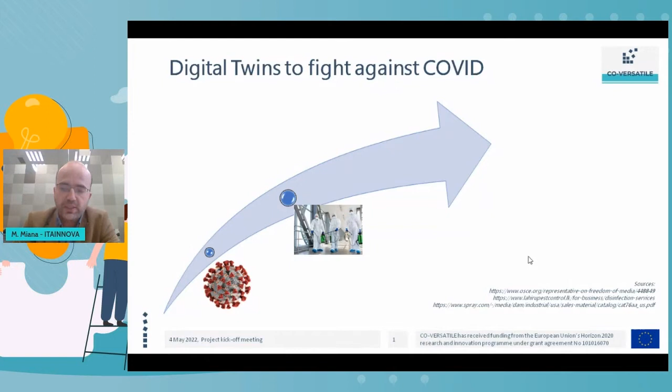At the beginning of the COVID crisis, there was a very important requirement about disinfection devices in order to be able to clean up all the surfaces to reduce the infection by the COVID virus. So it was necessary to obtain a spraying device that could perform in an effective and accurate way the disinfection of this kind of surface. As a result of this project, we are going to develop a digital twin that can help in the design of the spraying nozzles in order to obtain the best solution for the development of new spraying systems.

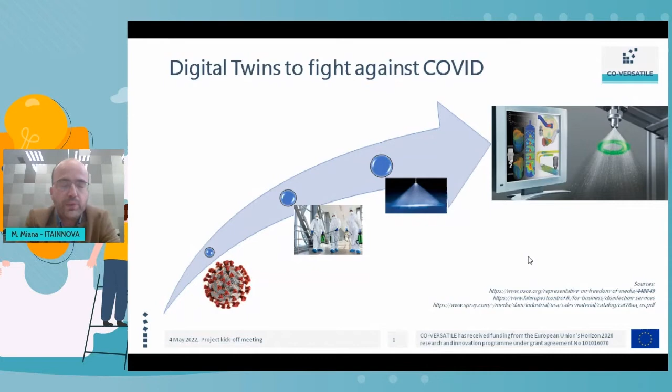ITAINNOVA is a technology center dependent on the local government of Aragon. Aragon is one of the 17 regions where Spain is divided. We are located in the north and east of Spain. We have more than 35 years of experience in guiding and helping companies to be more competitive and excellent through innovation and technological development. We are more than 230 people, about 20% of them have a PhD degree, and we have strong human resources in engineering.

We have more or less all kinds of engineering: mechanical, chemical like myself, electronic, computers, telecommunication engineers, and we have a significant amount of graduates in mathematics, physics, chemistry. Of course, we have a large number of people with strong curriculum on technical and scientific disciplines.

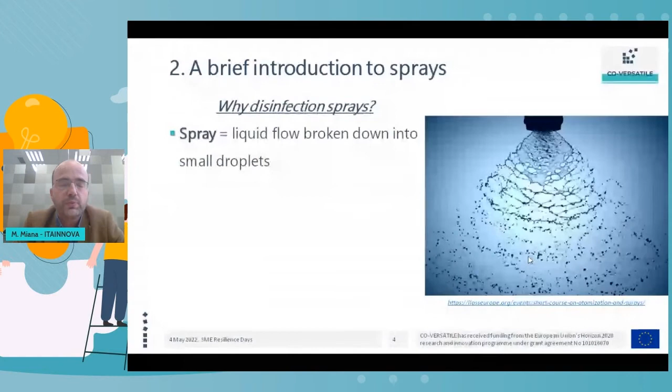The advantage of this kind of system is that you can reduce infection using lower liquid flow rates. If you want to reduce infection and reduce the amount of virus on a surface, it's better to use as little liquid as possible, so you obtain a cheaper disinfection process. And of course, you want to obtain better coverage than using a typical tube and soaking the surface.

When you use the disinfection spray, you obtain all this better performance in the disinfection process. And if we want to improve the design, we have to define the design variables or design parameters, in order to know if our new design is better or not than the previous one.

These design parameters are typically: the distribution of droplet diameters, the angle, the range, and the shape of the spray cone, shown in this picture.

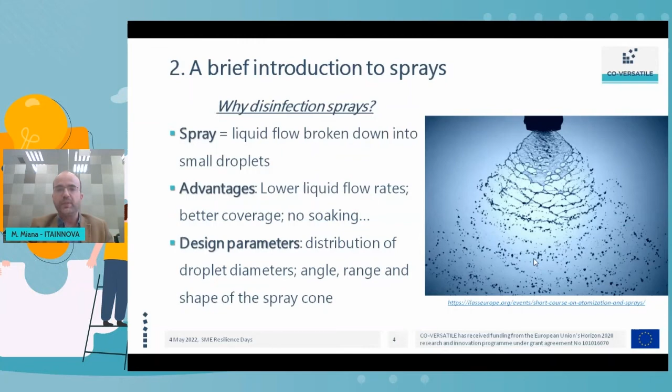There are two different kinds of spraying systems. The first one is hydraulic atomization, where a pump pushes the liquid flow through an orifice, and this motion provokes the breaking up of the liquid flow into small droplets.

The main benefit of hydraulic atomization is that you apply lower energy than the other system, which is pneumatic atomization. The main disadvantage is that you obtain a larger distribution of droplet diameters compared to the pneumatic system.

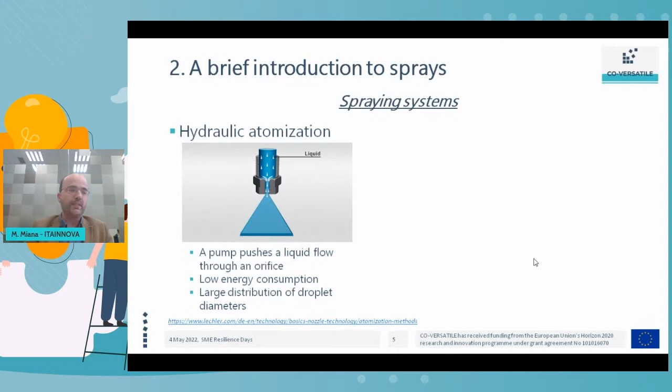In pneumatic atomization, you have a compressor that generates a high-speed airflow, and this airflow is responsible for breaking up the liquid flow. With this system, you're able to obtain droplets of smaller diameter and with a more uniform distribution.

On the contrary, if you remember your thermodynamics classes at university, compression of a gas flow requires more energy than compression of a liquid flow. So pneumatic atomization typically requires more energy than hydraulic atomization.

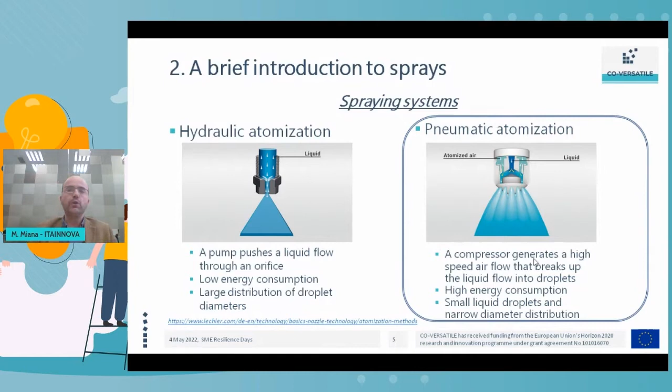In this project, we are going to focus only on pneumatic atomization. We are not going to deal with hydraulic atomization.

The heart, the main part of the spray system, is just the nozzle, where the liquid and the gas are mixed. All the design parameters of the spray - for example the shape, the range, the distribution of droplet diameters - are always governed by the shape and dimensions of the chamber where both streams are mixed.

You can see in the picture in the center of the slide that there are very different shapes of the spray angles, and very different concentrations of particles in the center and in a crown around the center. You can obtain practically all the shapes you want using different nozzles.

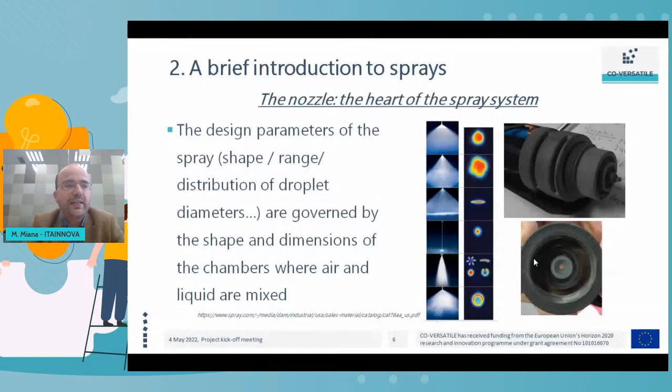The other parts are the same, using the same tubes, the same compressor, but the part that governs how your spray will work is the nozzle, and you have the nozzle analysis in this project shown in the picture on the right.

This design has been performed in collaboration with the company Tecnysan, and I would like to invite you to join this session that will be performed tomorrow.

The title of this session is the Electrostatic Disinfection Spray System. It will be performed by my colleague Jose Manuel Bielsa tomorrow from 10 to 11, and you can have a deeper knowledge about the product design of the suitcase and the backpack that has been developed in this project between ITA and Tecnysan.

Now we can start with the product design itself. First of all is the definition of the requirements - what Tecnysan asked us to give them an output about the performance of the spray nozzle.

First of all is the droplet diameter. We want droplet diameter very small, about 8 to 9 microns. Remember that 1 micron is the division of 1 millimeter into 1,000 equal parts, so 8 microns is a very, very small size.

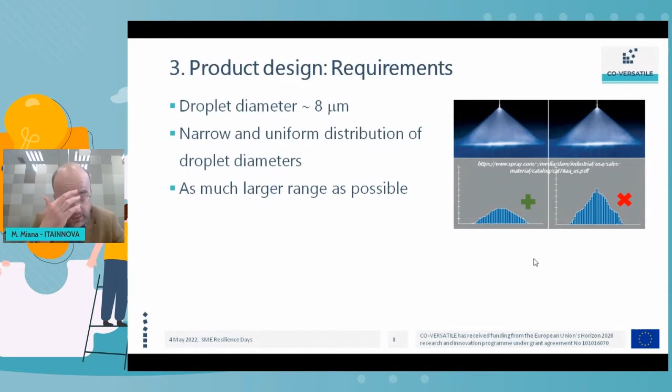We want as large a range as possible, but this requirement is not tight - it's not the critical one. The distribution of droplet diameters and the average droplet diameter, for example, are critical parameters compared to the range. And finally, of course, we want the lowest liquid consumption in order to obtain the most effective, cheapest solution for disinfection.

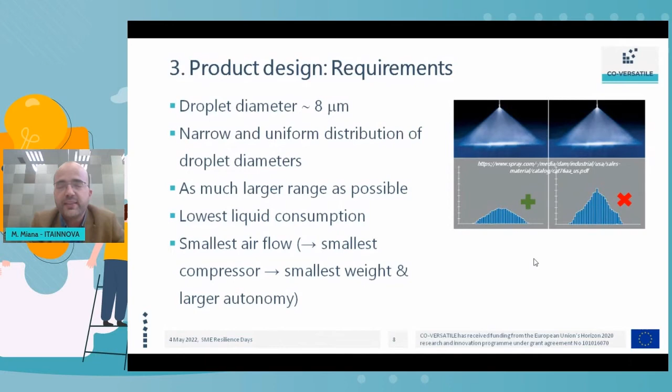In the same manner, we want the smallest airflow, because if we can produce the same breaking up of the liquid flow using the smallest airflow, we can buy the smallest compressor, and with the smallest compressor, the weight of the suitcase manufactured by Terstyansky and the autonomy of the device itself will be larger. So these are two very important design parameters of the final product. The airflow is just another requirement, and we want to get the same spray characteristics using as little air as possible.

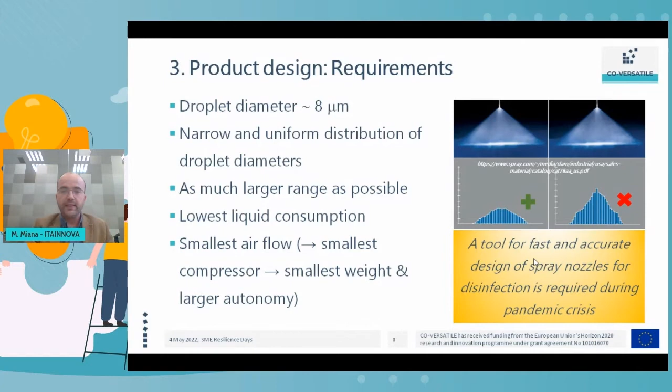Of course, if we want to meet all these requirements, we need a tool for fast and accurate design of spray nozzles for disinfection during the pandemic crisis. And this is the work that we have performed in this project.

What are the design variables? We have initially input variables, which are the flow given by the compressors. One of the main critical parts of this disinfection device is the selection of the compressor, and of course we need the supply chains shown by my colleague in the previous presentation.

So it's very important to obtain the right compressor that provides us the right airflow, and we can define the dimensions of the nozzle. In the picture on the bottom part, you can see the different dimensions that can be modified in the original nozzle developed by Terstyansky: we can modify the angle, the different radius, and the different lengths of the chambers included in the mixing region between the air and the liquid. The air enters the nozzle by the top channel, colored in green, and the liquid enters the nozzle by the inner channel.

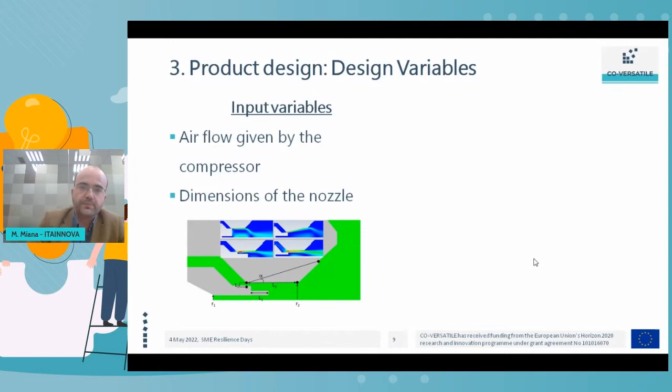Which are the output variables? The output variables are first the liquid flow rate. As I have already told you, we want the lowest liquid flow rate possible, and we want a uniform distribution of droplet diameters.

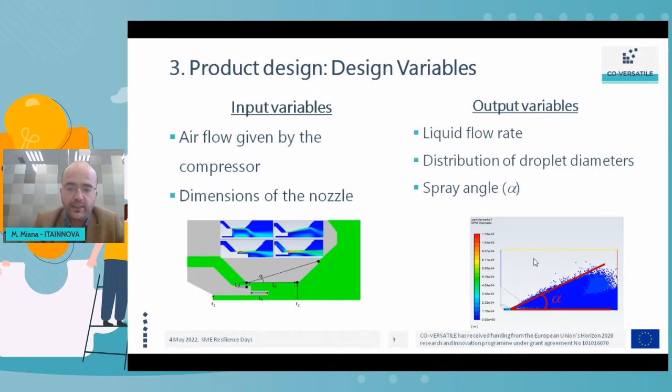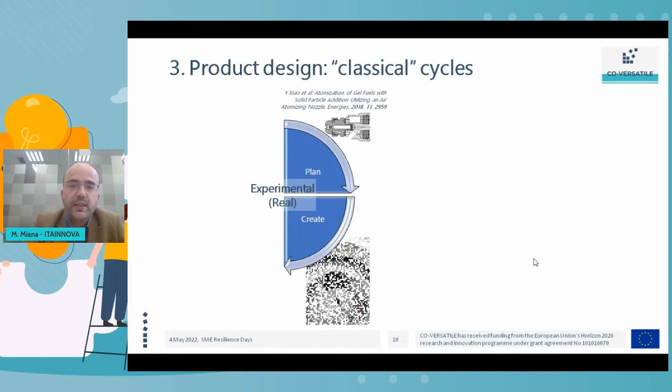For this kind of system, we can apply two different design cycles. The first one, the classical one, is the experimental design cycle, where we first start by planning a new design. We draw a blueprint of the new design, and with this drawing, we create it by means of 3D printing, building a physical prototype.

Once the physical prototype is built, we have it in our hands and can test it in a laboratory. We perform experimental tests and evaluate the performance of this physical prototype. Once the results are obtained, we investigate them and try to identify the critical points, the critical issues governing the behavior of the spray nozzle.

There is another design cycle, which at this point can also be considered classical: the numerical design cycle. It's very similar to the experimental one, but we obtain the information not from experimental tests, but from numerical simulations. First, we have to plan the new nozzle dimensions by creating the geometry in a CAD software.

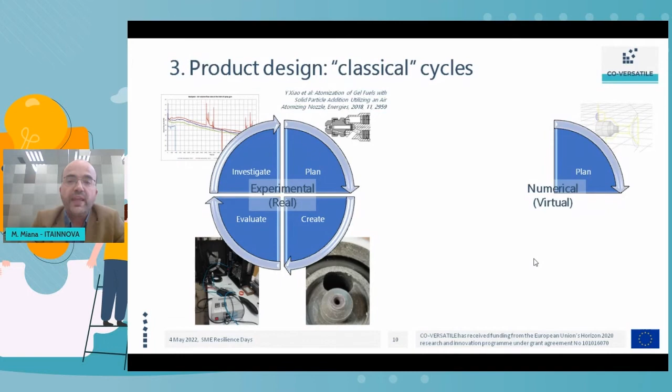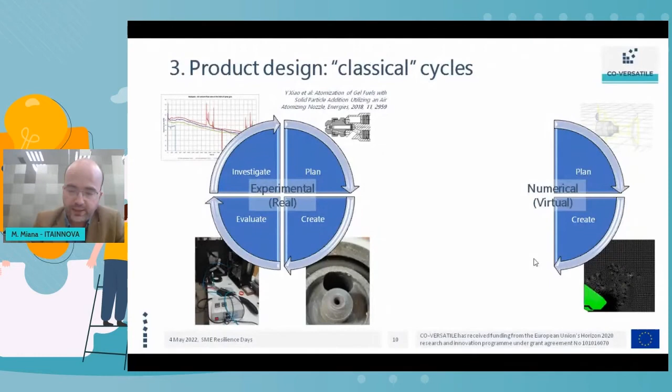Then we create the mesh using another CAD software, and we create the numerical model, selecting the involved models that represent the physical phenomena included in the system to be represented. With this, we can evaluate the numerical results: the pressure, the temperature, the velocity of the airflow, or the velocity of the liquid flow in all parts of the domain.

You can see in the picture, in black and green, the mesh — all the points where the numerical computations are performed — and on the colored drawing on the left, the results of the air volume fraction inside the domain. Using this representation of the numerical results, we can evaluate which is the best solution, investigate how the droplet diameters are modified by the different designs, and plan new designs in order to obtain the optimal solution.

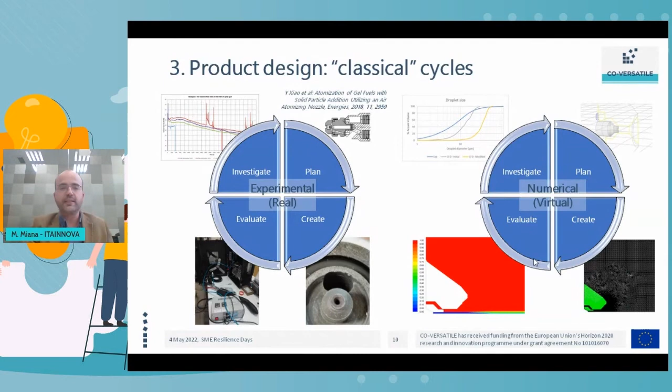These are the two different design cycles: experimental, which is more classical, and numerical, which is the design cycle that has been reported in the last 40 to 50 years.

Difference, advantage and disadvantage of each one: for the experimental design cycle, all phenomena included for this kind of spray atomization are very easy to analyze, such as what happens with electrostatic atomization. It's just pressing a button and you can obtain the results immediately. For numerical simulations, you have to include the appropriate numerical models in order to analyze the influence of the electrostatic charge.

Disadvantage of experimental tests: you have to build physical prototypes, so you increase the cost and you increase the time in order to be able to build the test, prepare the laboratory, build the prototype, prepare the laboratory, perform the test. Okay, it can take time.

There is a significant disadvantage of experimental tests: you have knowledge limited to the measuring points. For example, you can measure the pressure at the beginning of the nozzle and you can measure the droplet diameters at a certain distance, but you don't have information of the droplet diameters some millimeters upwind or downwind of the measuring section. On the contrary, numerical design cycles can obtain all the information: pressure, velocity, temperature, in all positions in all the calculated domain.

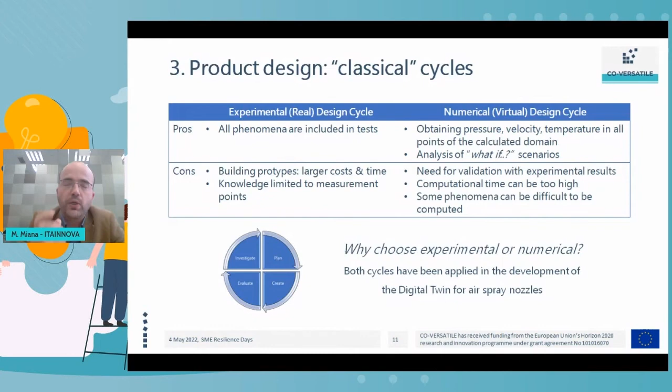So what are we going to choose, experimental or numerical? Both. We don't need to select just one. We are going to apply both experimental and numerical in order to build the digital twin, and we are going to obtain a new tool for the design of spray nozzles.

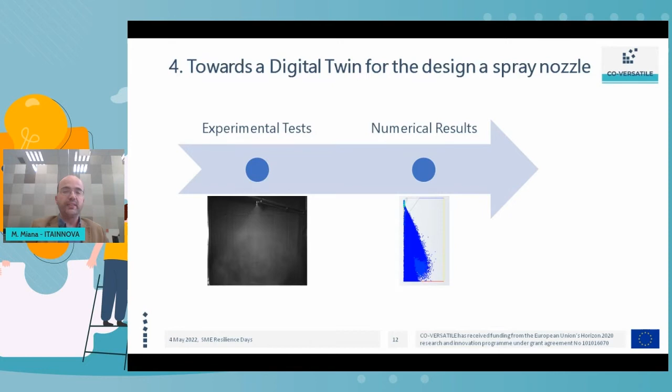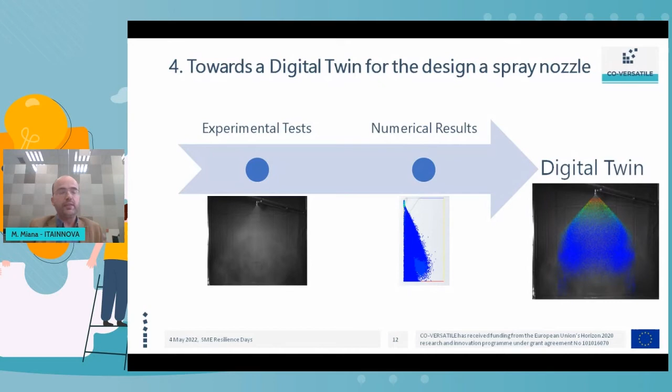With this, we can provide significant non-dimensional numbers that allow us a fast characterization of the phenomena included here. For example, turbulence, heat transfer by convection, by conduction, by radiation, can be defined if these phenomena are important or not, based on the results of the experimental test.

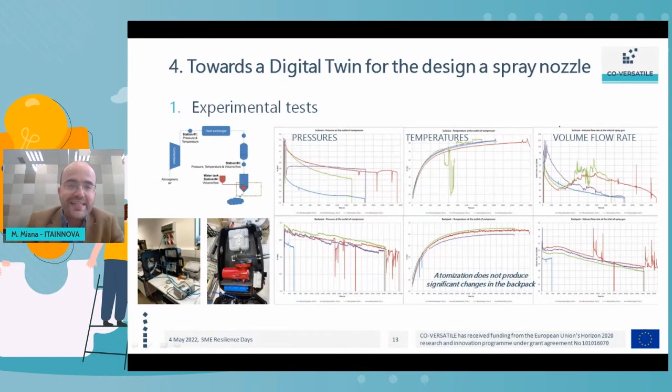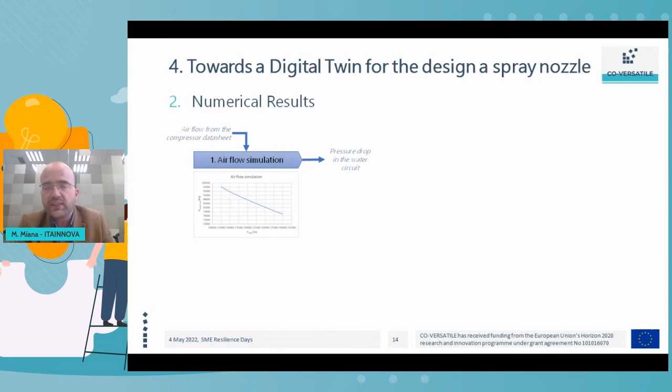With this initial information, we can perform numerical simulations, and the numerical simulations are performed in 3 stages. First of all, we are going to perform just airflow simulation without considering water. We obtain the airflow rate from the technical datasheet of the compressor selected. The technical datasheet says that this compressor can produce a certain airflow of, for example, 2 grams per second, considering this pressure drop after the compressor.

We have this input data, and with this input data, we can obtain the pressure drop in the water circuit. We are going to simulate how the airflow evolves along the nozzle, and we are going to measure the pressure drop between the tank reservoir of the liquid and the outlet of the liquid inside of the nozzle. This pressure drop will be applied in a water flow simulation, and this water flow simulation will provide us the water flow rate, or the liquid flow rate, that will be passing through the different parts up to reaching the nozzle.

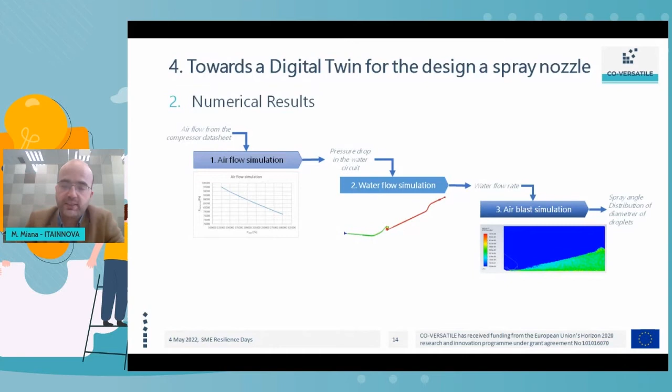Once we have the water flow simulation, take into account the first step is just airflow simulation, which is monophasic. Second step is water flow simulation, considering just the water stream. And in the third step, the air blast simulation, we mixture liquid and gas domains, applying the water flow rate obtained in the second step, to obtain the spray angle and the distribution of droplet diameter at all points of the simulated domain.

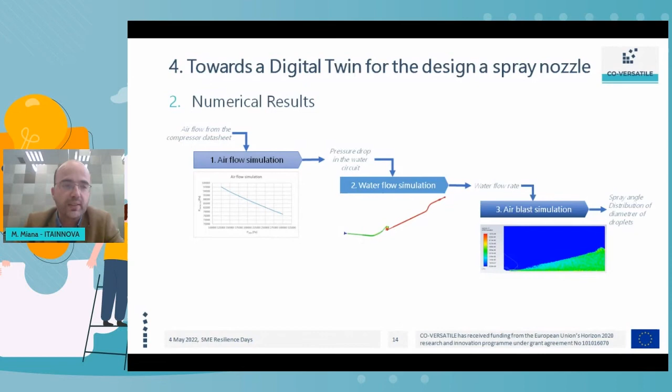This is the numerical methodology we developed for this project. The main advantage is that the simulation of one geometry, one design case, one design point, takes about 2 hours. So it's an affordable time. If we had to spend 2 or 3 weeks per geometry, that would not be affordable.

Why? Because for the digital twin, we need to consider different geometries, and considering all the parameters involved in the definition of the geometries, you have to simulate at least near 200 different geometries. So if you need 2 weeks multiplied by 200 cases, that's a lot of weeks. This is not affordable. We need to finish the digital twin as fast as possible.

So what we perform is simplifying models that capture most of the physical phenomena, and with these simplified models we are able to obtain enough information from the numerical results. We are currently working on the numerical results, and you can see that different design variables can produce different atomization results.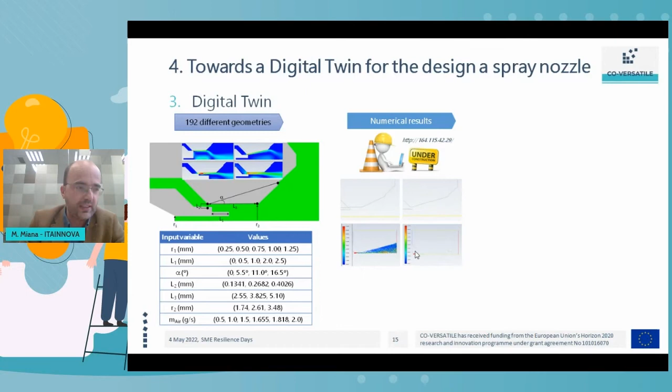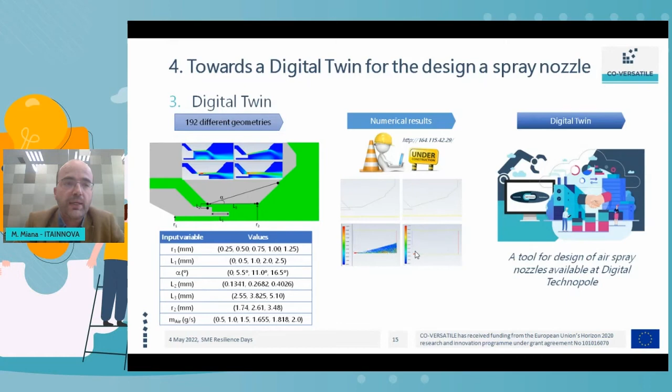And finally, all the numerical results are put together inside the digital twin. The digital twin will be the tool for the design of the spray nozzle, and it will be available at the digital Technopole, which will be presented by my colleagues after this initial presentation.

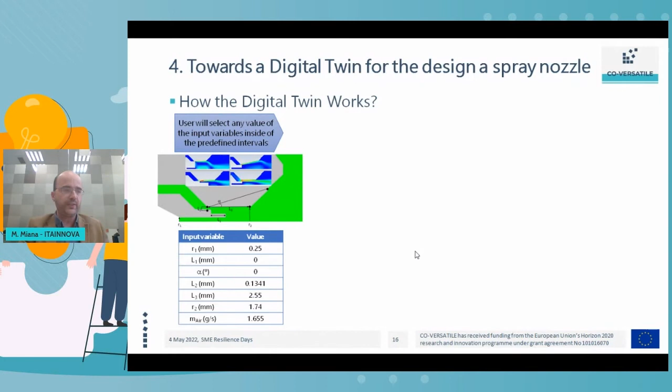How does it work? First, users can select any value of the different variables that are predefined within the predefined intervals. Next, a reduced order model will calculate the output variables from the previously calculated results. You can define any value and obtain the output results using the information from the reduced order model.

And finally, the tool will show you the obtained output variables immediately. You don't have to wait 2 hours, you don't have to wait 2 weeks in order to obtain the variables.

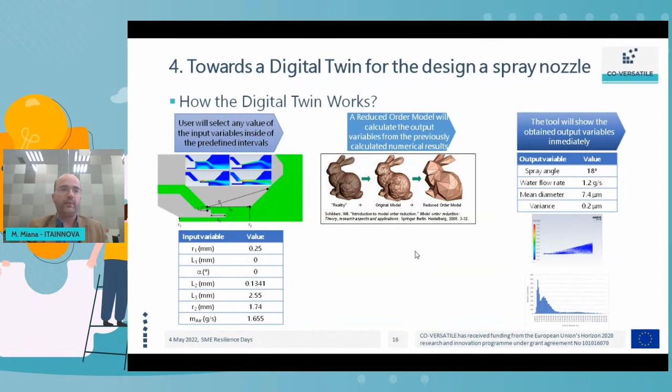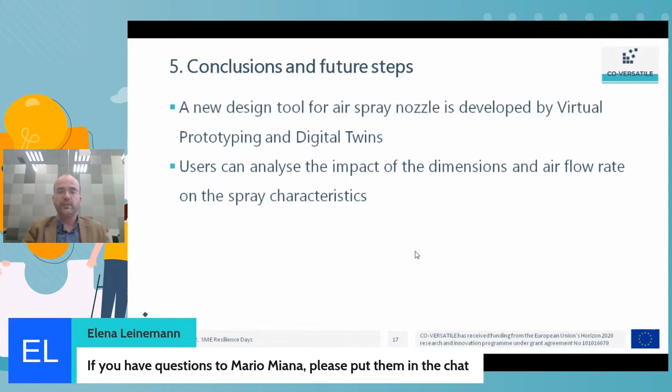So in conclusion, we have a new design tool for the air spray nozzle, fully developed by means of virtual prototyping and digital twin. We can provide users a tool for the analysis of the impact of the dimensions and flow rate on the spray characteristics, and this design tool will be available at the digital Technopole.

In the meantime, while Mario is searching for it, let me try to tell you with my own words, because I also have a background in humanities and I didn't really understand it the first time. Basically, a digital twin is when, for example, you've got a manufacturing company and you would like to try some technical process, but you don't have the required machines or technology for it. The digital twin will do the process for you in a simulated environment, and based on this simulation, you can draw conclusions on what will happen in your company. If I didn't say it too badly.

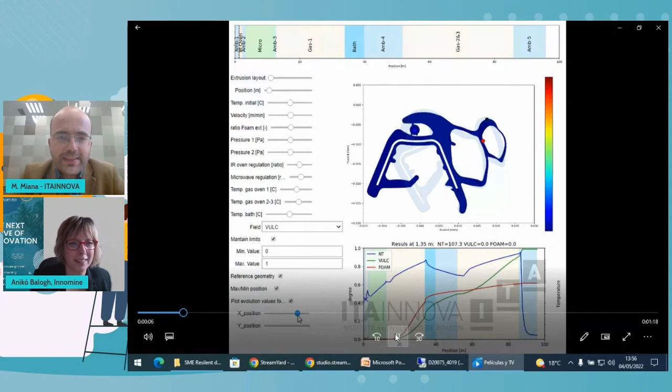Yes, we can apply the methodology to new products, but it is important to define the requirements, the geometry, and the process that define the product. For us, it's very necessary to have knowledge from the customer about their product, because we know how the numerical tools can be applied, but the requirements and the definition of the parameters, which are the important keys, can be improved if the customer gives us all this kind of information.

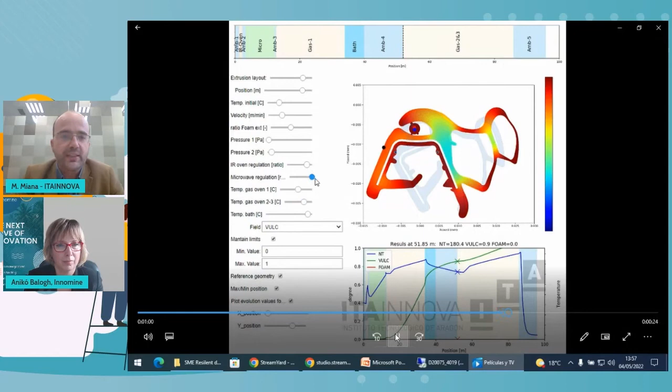So we have developed this methodology for braking components in automotive. We have developed this methodology for heat exchangers. It's a very wide methodology, but we need the input from the customer in order to obtain the most successful results.

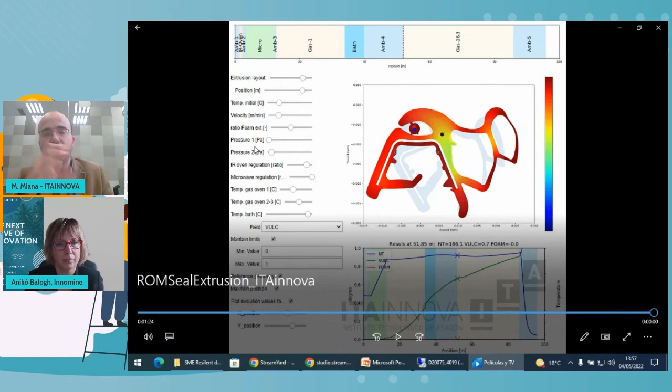So basically what we see right now is the simulation itself, right? Yeah, you see the digital twin. You can see that you are able, for example, to modify pressure into different values, and the application shows directly the physical properties of the plastic. And it's not necessary to calculate every point - you just have to obtain specific points inside of the map, and the reduced order model is able to interpolate.

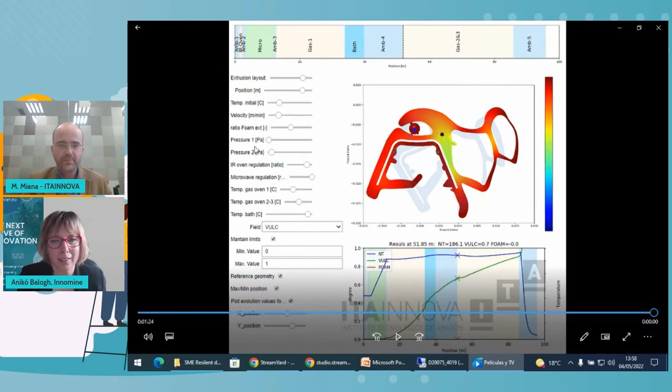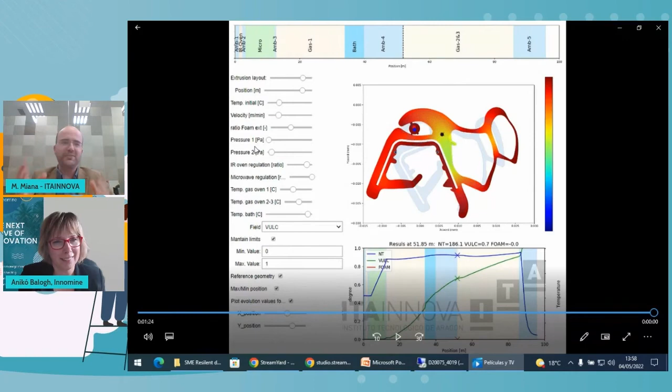I think it was a very good demonstration. It's always easier to imagine something when you see it and not just hear about it. I had prepared not to insert it into the presentation because it can produce a crash, but it just gave us some visual introduction to it. It's a common question because it's very abstract - the concept of digital twin, you can understand experimental tests and numerical results, but when you mix it, you obtain a reduced order model. It's so abstract, kind of a very theoretical idea, but when we see it now, it's easier to understand.

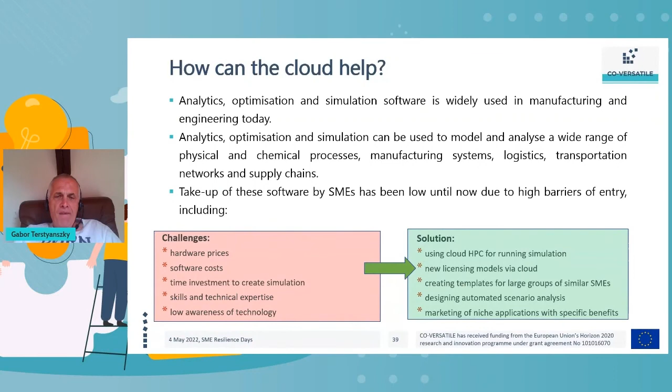Okay, so who we are. Basically, we are at the University of Westminster. It was one of the first polytechnics in the UK. It became a university in the late 20th century, and it's a large university with almost 20,000 students representing 170 nationalities. The university has very intensive research cooperation with research organizations and companies.

We are from the Research Center for Parallel Computing. We are involved in research on distributed and parallel computing infrastructures. Currently, we are focusing on cloud, fog, and edge computing. We also provide application support for non-IT users. For example, we help them describe their applications, and deploy and run their applications in the cloud. Next slide, please.

So what are we doing? First, we sit down with the customers, for example with companies. We analyze the application — basically a problem statement. Then we describe the application using a specific template where we describe the hardware resource requirements, data resource requirements, where the input data should be uploaded, and where the results will be available. Using this template-based description, we deploy and run the application.

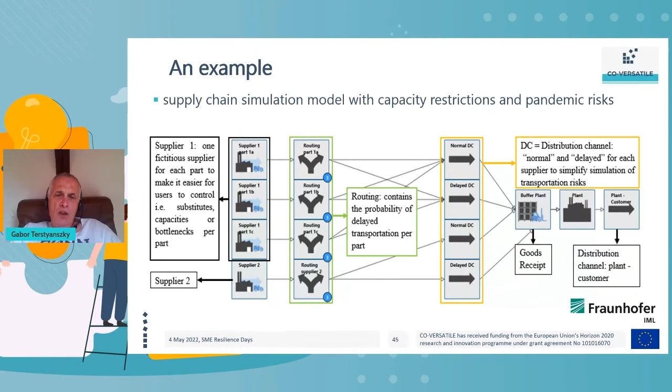Okay, so this is an example. The supply chain simulation is complicated enough, the cloudification is complicated enough. What is the output for the companies? For the companies, basically there is a page, and they have to upload their input data, and then by clicking on a button, they can run the simulation. And then the results will be available.

So what is the major advantage following this solution? Once they have a model, the supply chain model, it can cover quite a lot of scenarios. If there is a change or an unexpected event, in most cases they have to modify the inputs, and then they can rerun the supply chain simulation again and again, and get the corresponding simulation results or outputs. Based on the outputs or results, they can make a decision on what to change in their supply chain. Next slide, please.

Okay, so basically that's all. Thank you for your attention. If you have any questions, I am ready to answer your questions.